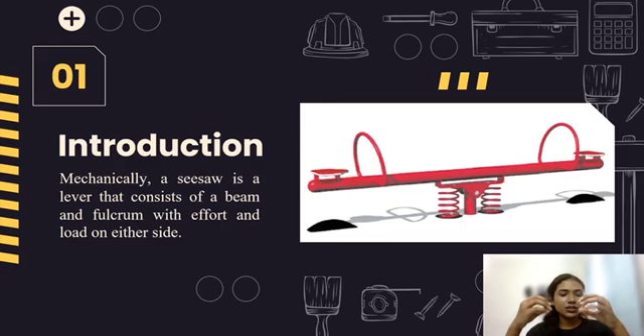Introduction: mechanically, a seesaw is a lever that consists of a beam and a fulcrum with effort and load on either side. The seesaw lacks safety properties like having sharp edges, less support, and less stability, mainly from their mechanical parts. Thus, the seesaw is redesigned for the safety of children who are using it.

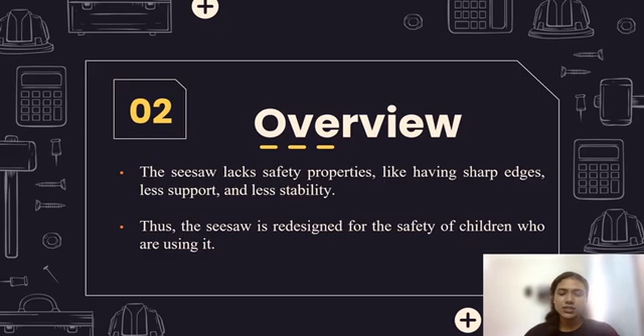The components for modification that is done in this mini project is the spring, screws and fasteners, which is the nut, a shaft, and the bearing in a seesaw.

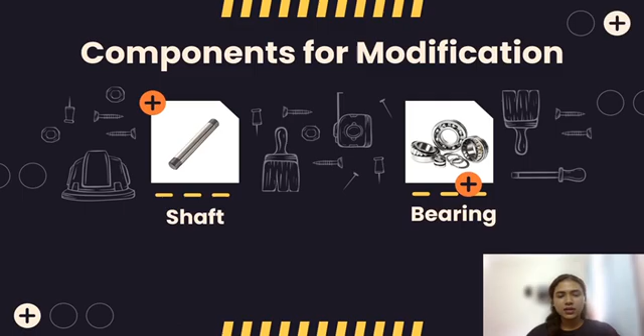The design objectives for our mini project is first, to improve the safety aspects of at least 3 or 4 components in a seesaw. Second is to increase the maximum load, spring index, and the stability of the spring. Third is to make sure the nuts have less bearing stress with a washer compared to without a washer. And lastly, to avoid failure and any potential consequences that certain material may be present in bearing.

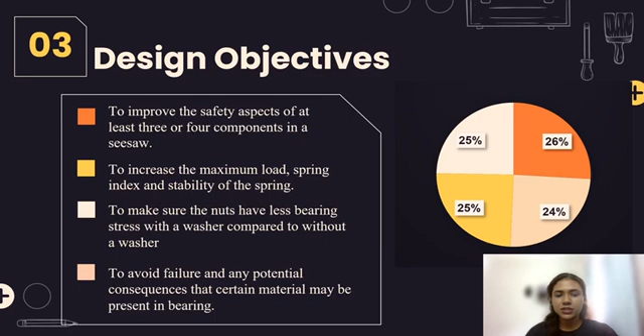However, our main objective will be to improve the safety aspects of at least 3 or 4 components in a seesaw. Hi, Assalamualaikum. My name is Aisha binti Alias.

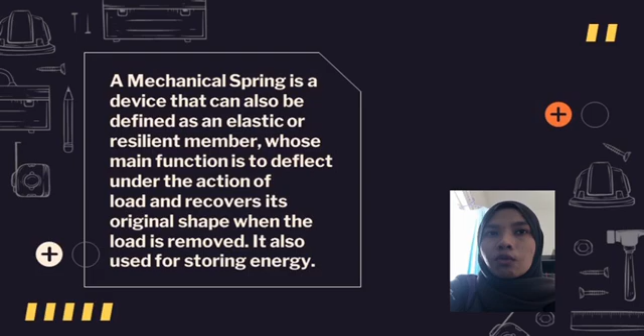My matric number is 201110736, and I will talk about the spring component in our seesaw. First, what is spring? Spring is a mechanical device that can be defined as an elastic or resilient member whose main function is to deflect under the action of load and recover its original shape when the load is removed. It is also used to store energy.

From this formula, the spring rate that we calculated is 5,662.137 Newton per meter. From the spring rate, we can find the mean diameter, which is 11.37 centimeter. Then we find the value for stresses, which from this formula, we get 129.73 megapascal. And then we find the spring index by using this formula, and the C is 11.37.

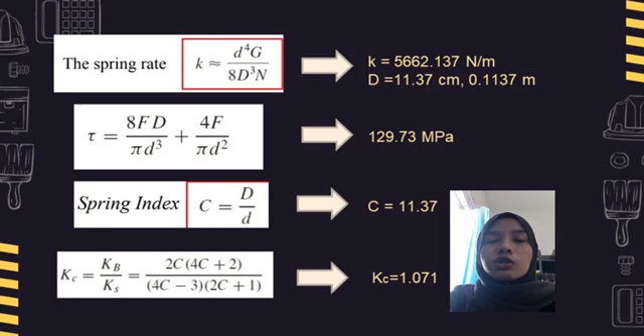For the curvature effect, the stress concentrated type of effects on the inner fiber due to curvature can be ignored for static ductile condition due to localized cold working. For the maximum shear stress for helical spring, we use this formula. From this formula, we get a value of 138.9 megapascal.

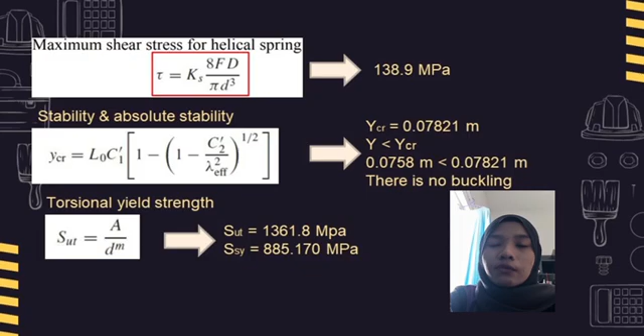Moving on, the maximum loading can go up to 170 kg each side, while the spring constant is now 5,662 Newton per meter instead of 3,000 Newton per meter. The value is still below the critical deflection, thus ensuring the spring will not buckle under the maximum operating load. Our objective to increase the maximum load is achieved.

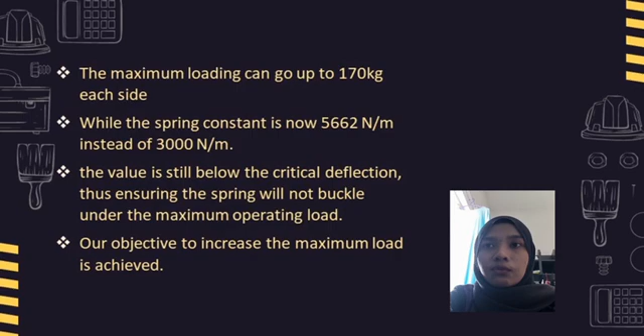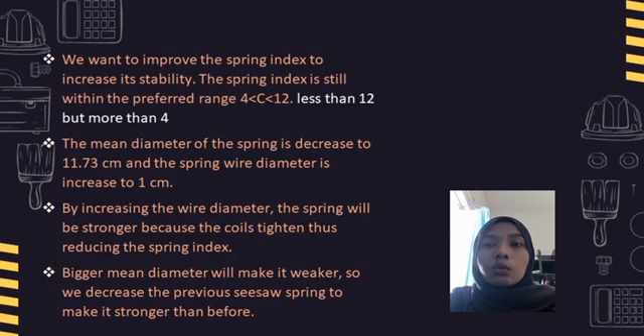We want to improve the spring index to increase its stability. So the spring index is still within the preferred range, which is less than 12 but more than 4. The mean diameter of the spring is decreased to 11.73 centimeter, and the spring wire diameter is increased to 1 centimeter. By increasing the wire diameter, the spring will be stronger because the coil tightens, thus reducing the spring index. The bigger the mean diameter, the weaker it is. So we decreased the previous seesaw spring to make it stronger than before.

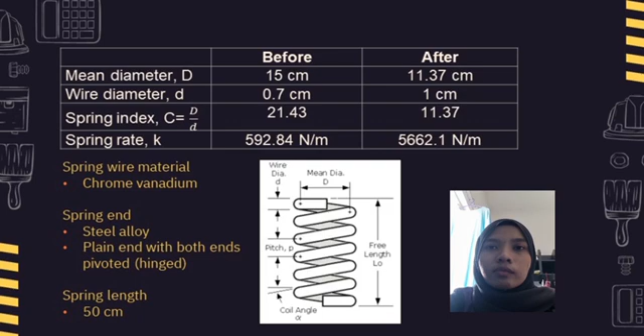So from the diameter, we calculated the spring index. Before it is 21.43, so it is over the range. After modification, it is in the range, which is 11.37. For the spring rate, before it is 592.84 Newton per meter, and after modification it became 5,662.1 Newton per meter. For the material of the spring wire, we use chrome vanadium. For the spring end, we use material steel alloy, and the type is plain end with both ends pivoted (hinged). For the length, we use 50 centimeter.

For the components for modification, I'll be presenting on the screws and fasteners.

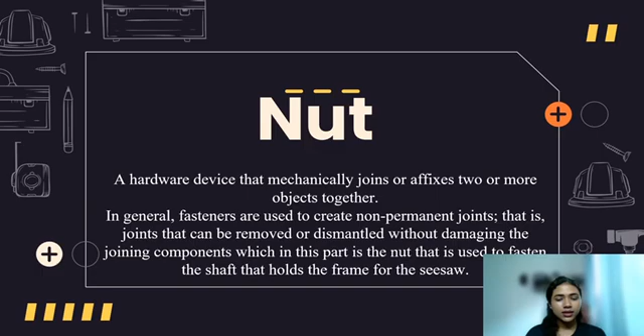I'm Melissa Lawrence, and I'll be presenting on the nut part of the screws and fasteners topic for this project. A nut is a hardware device that mechanically joins or affixes two or more objects together. In general, fasteners are used to create non-permanent joints, that is, joints that can be removed or dismantled without damaging the joining components, which in this part is the nut used to fasten the shaft that holds the frame for the seesaw.

This would be the CAD drawing of the nut. The 2D design was made first, and then it was extruded. The sides were chamfered for a 45-degree angle, and then the threads were added.

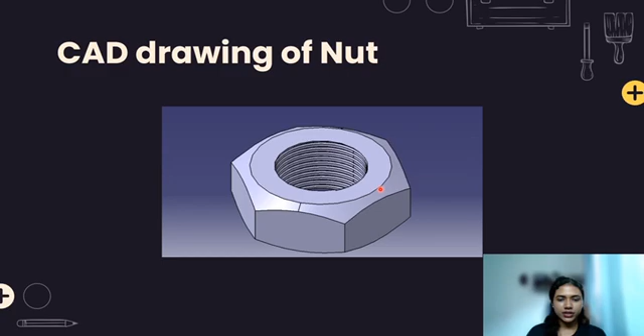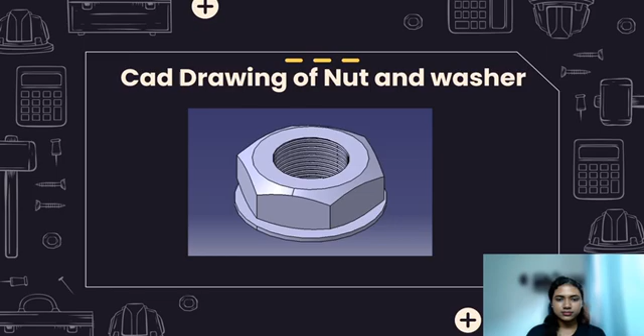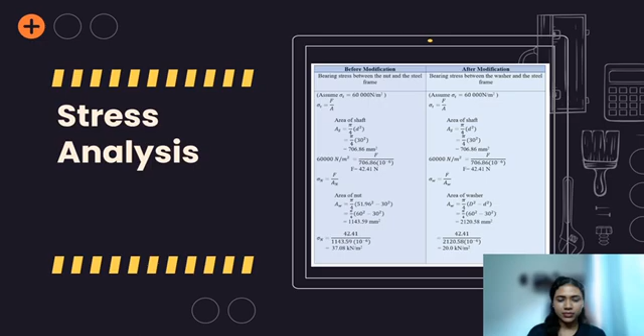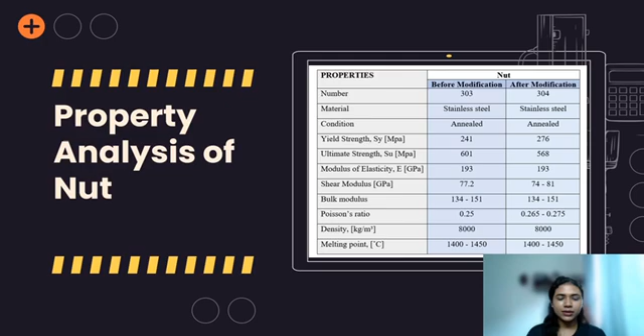A property analysis of the nut was also done to compare number 303 material and number 304 material. Even if the modulus of elasticity is the same for both materials, the yield strength for material 304 is higher compared to material 303, thus helping the safety factor of the seesaw modifications.

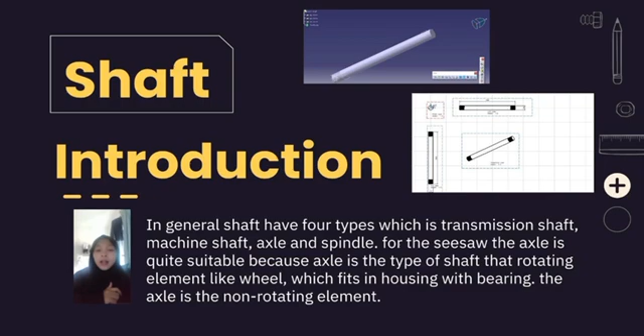At the upper right is our design. We use CATIA. From top to bottom, we make a thread, and the bottom of the CATIA design is the drafting, which has 3 views: bottom view, top view, and side view.

Now we go to the next slide, which is shaft analysis. First, at the upper right is our calculation. We use the shear and moment diagram to calculate the maximum bending stress.

For the modification, we change the shaft diameter from higher to lower, from 40 mm to 30 mm, to accommodate a higher maximum load. The range for this property is 19 until 32 mm, so 30 mm is within range.

The calculated maximum bending stress as a result of the maximum operating load is 37.89 megapascal, which is not a major issue for the material we selected. The material is AISI 1018 steel hot roll.

At the bottom, we make a comparison before and after for the diameter. Before, the diameter is 40 mm, and after is 30 mm. For before, the maximum bending stress is 15.989 megapascal, and for after it is 37.899 megapascal. Now from this maximum bending stress, we get the maximum load.

The maximum load is at diameter 30 mm.

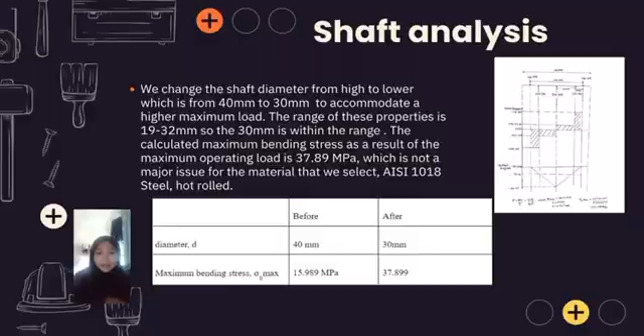I will explain about the bearings. What is a bearing? A bearing is used to guide and support an oscillating, rotating, pivoting, or sliding shaft or wheel. There are 3 main functionalities of a bearing. Firstly, a bearing is used to decrease friction while keeping the shaft moving smoothly and consistently. This is one of the most prominent functions of the bearing.

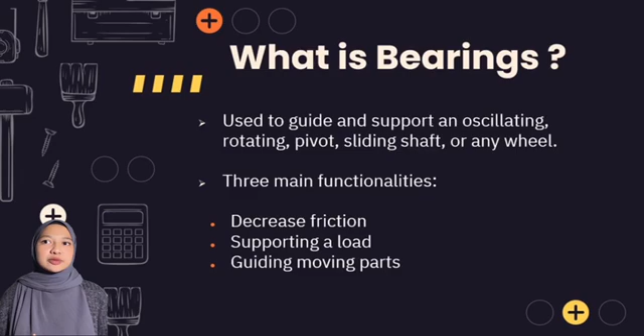Next, the bearing is used for supporting a load, which can effectively decrease the energy and effort needed to move or slide an object. Lastly, the bearing is used for guiding moving parts such as pivot, shaft, and wheel, as the shaft readily pushes the bearing in the same direction in which it is moving the load.

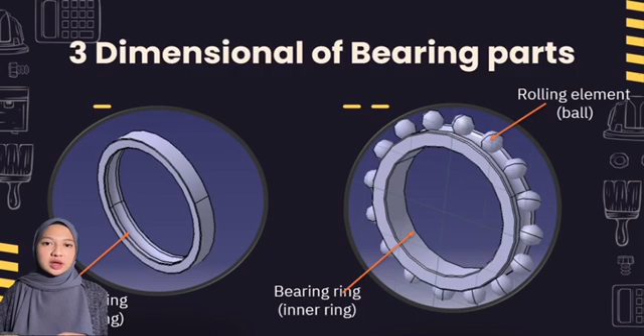Before we go further, I will explain a bit how I designed a bearing in CATIA V5. First, I use bearing rings, which is the outer ring, and then I draw the inner ring and the ball. Next, I will assemble the parts, and this is the result as you can see in the picture. This is an isometric view of the bearing.

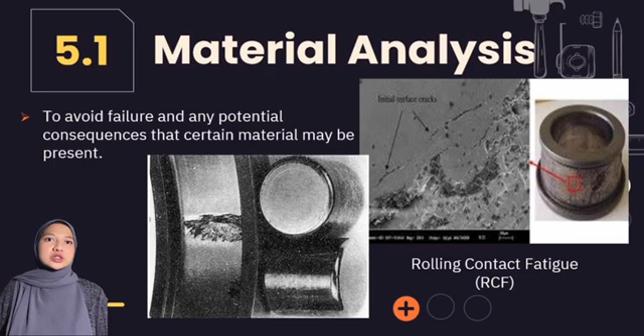Material for the bearing was analyzed to avoid failure and any potential consequences that certain materials may present. As you can see in the picture, this is one example of failure, which is rolling contact fatigue, or RCF. There were 3 factors to be considered in the material analysis.

The first one is bearing must be able to handle the anticipated pressure and weight of the radial loads, axial loads, and combined load in order to function efficiently. And the next one is bearing must have a speed dedicated to withstand the extra force added to the bearing motion. And the last one is the maintenance.

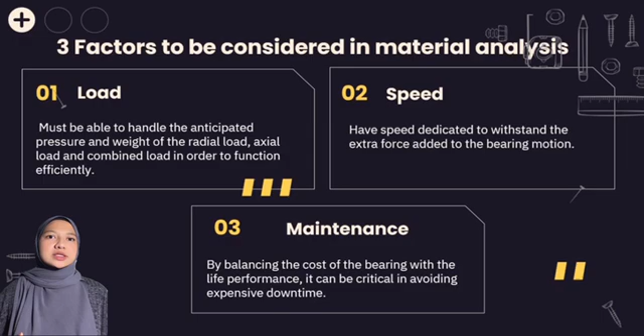By balancing the cost of the bearings with the life performance, it can be critical in avoiding expensive downtime. So as you can see in the picture, this is a material analysis before and after modification.

The type of bearing used in the seesaw were the stainless steel bearings. Stainless steel bearings were divided into 4 materials, which are 440, 304, 316, and 420. The most common stainless steel was 304 and 420. 304 stainless steel bearing has good corrosion resistance, heat resistance, and low temperature strength. This type has small friction coefficient, high limit speed, simple structure, low manufacturing cost, and requires little maintenance. Hence, after analyzing all the considerations, we decided to modify the material from 420 to 304.

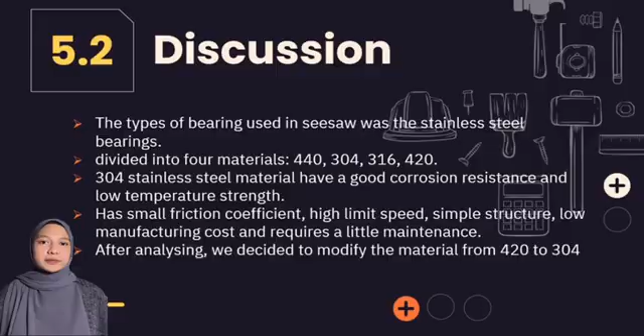Expected outcome: we explain about improvement and modification for four components, which is spring, screw and fastener, shaft, and bearing. We'll go one by one.

Spring: to increase the maximum load, the diameter of the wire must increase to strengthen the spring and can reduce the index number.

Screw and fastener: for the safety factor in the seesaw, a washer must be added before the nut to reduce the load caused by the shaft. Shaft: to increase the maximum load, the diameter must change from a large value to a small value, according to the range provided, to get a good maximum load.

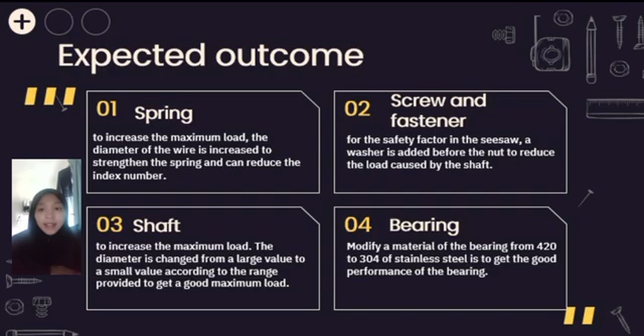Bearing: modified the material of the bearing from 420 to 304 stainless steel to get the good performance of the... For discussion, first, the spring.

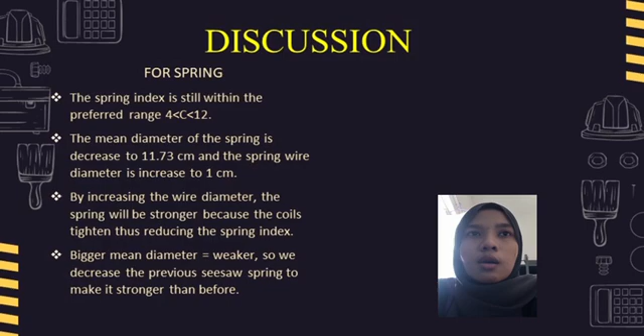We want to improve the spring index to increase its stability. By increasing the wire diameter, the spring will be stronger because the coils tighten, thus reducing the spring index. And a bigger mean diameter will make it weaker, so we modify it by decreasing the previous seesaw spring to make it stronger than before.

Next, the washer is an unthreaded piece that fits onto the bolt shaft. A nut pulls the workpiece together along the bolt shaft, therefore adding a washer before the nut will have distributed the load caused by the shaft. Other than that, we can also change the hexagonal nut to a nut with a cap for safety purpose.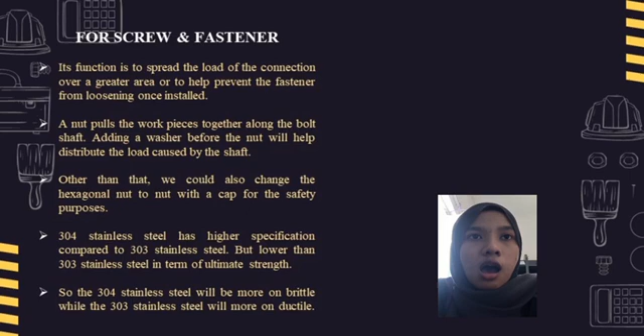Based on the comparison of screw and fastener properties in the table of the two material types, the 304 stainless steel has higher specification compared to 303 stainless steel. However, the ultimate strength of 304 stainless steel is lower than 303 stainless steel. So the 304 stainless steel will be more brittle, while 303 stainless steel will be more ductile. From the result, we can know that for brittle material, the ultimate tensile strength is close to the yield point, whereas in ductile materials, the ultimate tensile strength can be higher.

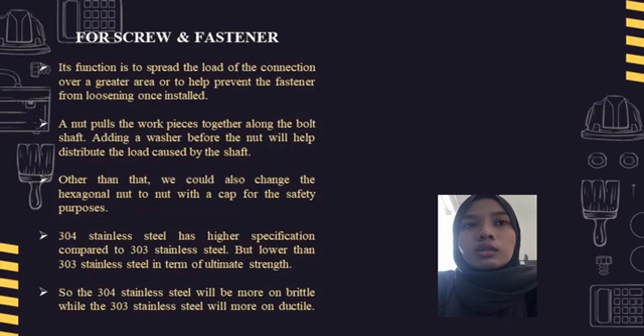For the shaft, we modify the shaft diameter from high to low to accommodate the higher maximum load. The range of this property is within the range that we wanted. The calculated maximum bending stress of the maximum operating load is 37.89 MPa, which is not a major issue for the material that we select.

Next, the type of bearing used in the seesaw are the stainless steel bearing. Most common stainless steel used was 304 and 420 materials. The 304 stainless steel bearing has good corrosion resistance, heat resistance, and low temperature strength. This type has small friction coefficient, high limit speed, and simple structure, low manufacturing cost, and requires little maintenance. Hence, after analyzing all the considerations, we decided to modify the materials from 420 to 304.

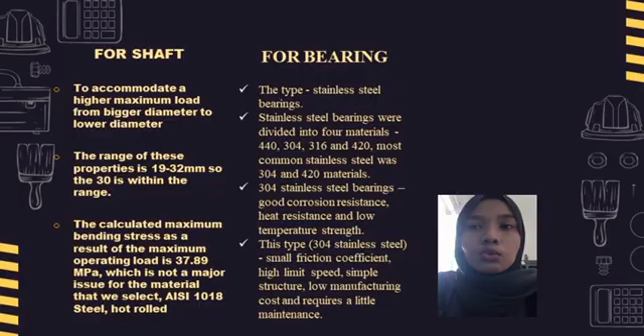So the conclusion for this project: we designed and did the drawing part for the seesaw. The objective of the project had been successfully achieved, and improvement has been done for every component part that we had chosen, which are springs, nut, shaft, and bearings. With proper and suitable analysis by using calculation, the design for the seesaw has been improved.

To make an improvement for the springs, the wire diameter for the spring has been increased. The coil was tightened, thus reducing the spring index, and the spring has become stronger. We also redesigned the screw and fastener by adding the washer and the nuts to make sure the nuts have less bearing stress. The improvement for the shaft also has been done by modifying the diameter of the shaft due to an increased maximum load.

Hence, to avoid failure in any potential consequences that certain material may present in the bearing, a material analysis for bearing has been done. The material has been modified from 420 stainless steel to 304 stainless steel.